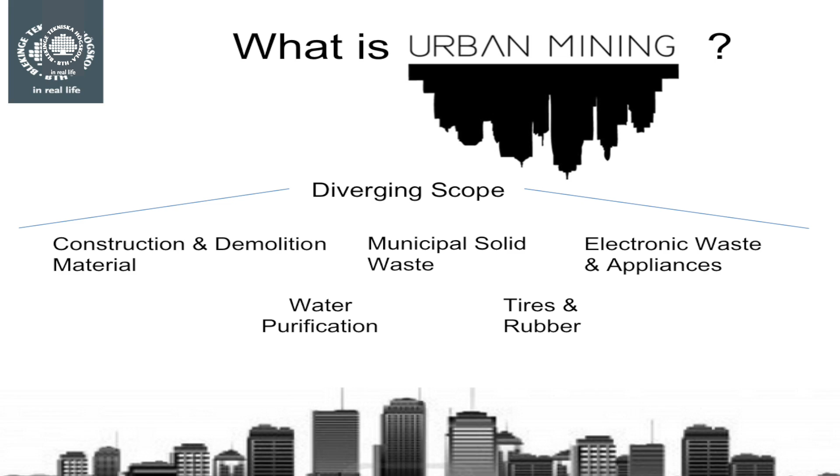To start our investigation, we have researched what the following areas look like today: water purification, tires and rubber, municipal solid waste, construction and demolition materials, and electronic waste and appliances. Together, these areas represent a big part of what we believe is the divergent scope of urban mining.

During our research and development phase, we tried to look for ways to answer the questions of urban mining. Basically, we tried to look for ways to build the bridge between the old and the new, and doing this in a sustainable way.

After our researching phase, we found a solution which we believe is a stepping stone towards a more sustainable mining environment in the construction and demolition area.

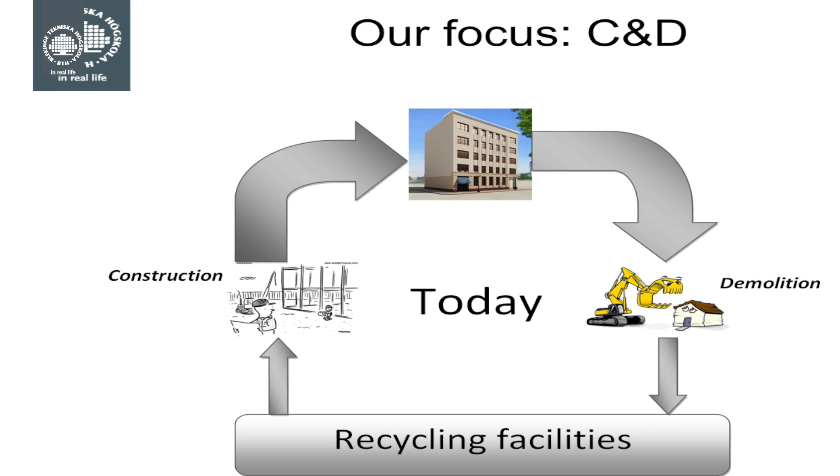So, this is what it looks like today when a building is going to be demolished. We have a company, they will demolish the house, they will do some rough sorting on site, put the waste in different containers before it's shipped to a municipal plant. At the municipal plant, they will do some further sorting of the materials before it's sold to a third company. For example, concrete will be sold to a company that will use it for aggregate or filler in new materials. They will then use it to make, for example, new concrete that they can sell to construction companies that can use it to make new houses. So we have a lot of different companies and we have a lot of different transportation back and forth.

During this project, we've been visiting a lot of different sites and companies, and we conducted interviews at these companies just to see how the material flows today and what the workers at these places think can be improved, or what problems they see in their everyday work.

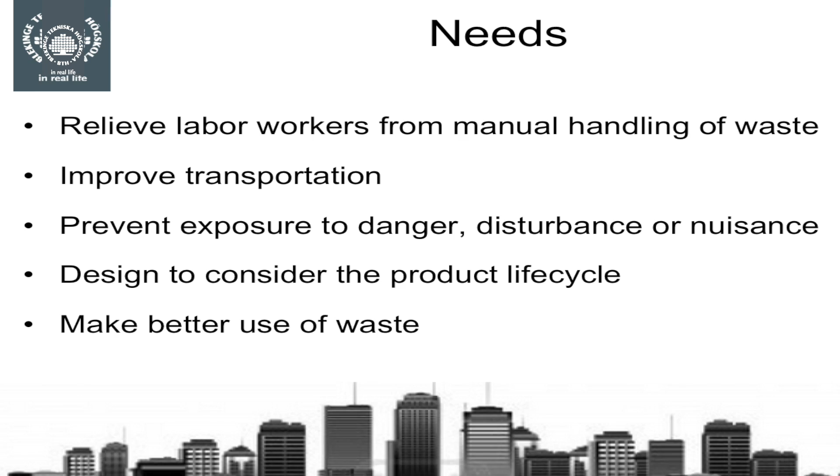From these, we got a huge list of needs, and this, what you see here, is a summarized list of those needs. We have these needs in mind when we start to discuss and think about our vision and our goals in this project and this problem.

For example, one big need is that we want to build a product that is safe to use for the users, the workers, but also safe to be around for unaware people that just walk by. And of course, we don't want it to harm the environment in any way.

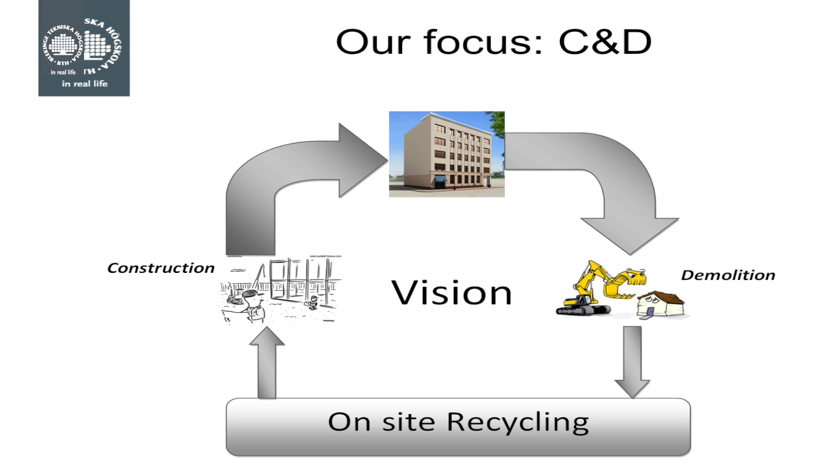So this was how it looked today, and we want to change that. This is our vision. We don't want to change anything in the demolition or the construction part. However, we do want to move the recycling phases to an on-site recycling instead of transporting the material off-site all the time.

This is just a regular old construction or demolition site. We have a lot of heavy equipment machines that tear down the building and put the waste in different containers. And then we have these trucks here. They will come and pick up the waste from these containers and move it to a municipal plant, and the material will go through the steps I told you before. We don't want this. We want to introduce our product instead.

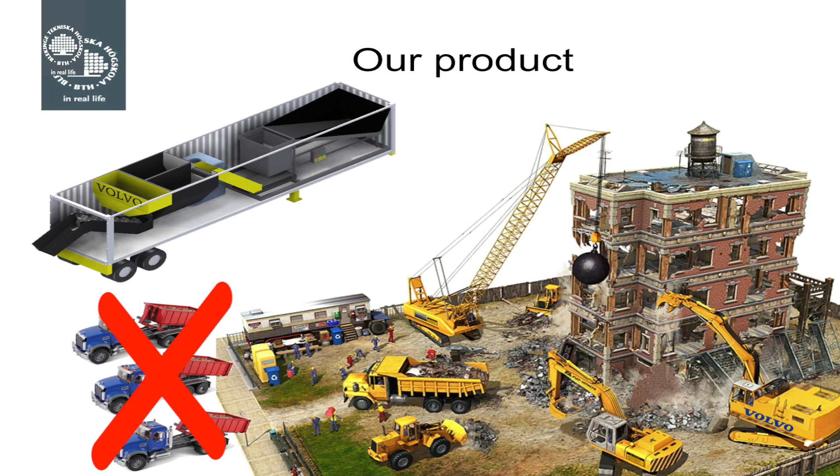This is a concrete recycling plant that is powered by electricity. Basically, you transport it to the construction site or the demolition site, and you leave it there, and it can operate during the whole process of tearing down the building and building up a new one. Basically, you make new concrete out of the old one.

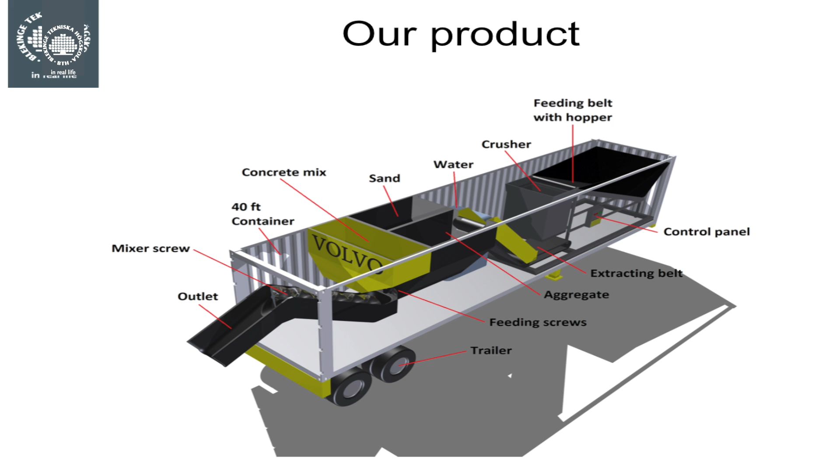So how does it work then? Well, first of all, we have a 40-foot or 12-meter long container that is very easy to transport by boat, train or truck. And it stands here on a chassis or a trailer when it's in use. And that means that the heavy equipment machines on site can move it themselves on the site short distances.

It all starts right here in the front, where an excavator unloads old concrete into this bucket right here, before the old concrete is transported to the crusher in the middle here. And it crushes the concrete down to a small aggregate that we can use to make the new concrete. On the way to the bucket in the middle, where the aggregate is stored before it's used to make the new concrete, we will remove any metals that might be in the mix from, for example, reinforced concrete.

We have another two buckets in the middle, one for sand and one for concrete mix, that is also needed to make the new concrete.

In the end, everything is mixed together right here, and water is added in the mixing screw. The mixing screw will then mix the concrete together, as well as transport it to the outlet right here, before we can use the new concrete to build something new.

For example, wall units or tiles that we can use to build a new house. And actually we believe that we can produce 40 cubic meters of new concrete every hour with this machine.

And we can use up to 30% old used concrete in supporting walls, and even more than this in products that are less demanding.

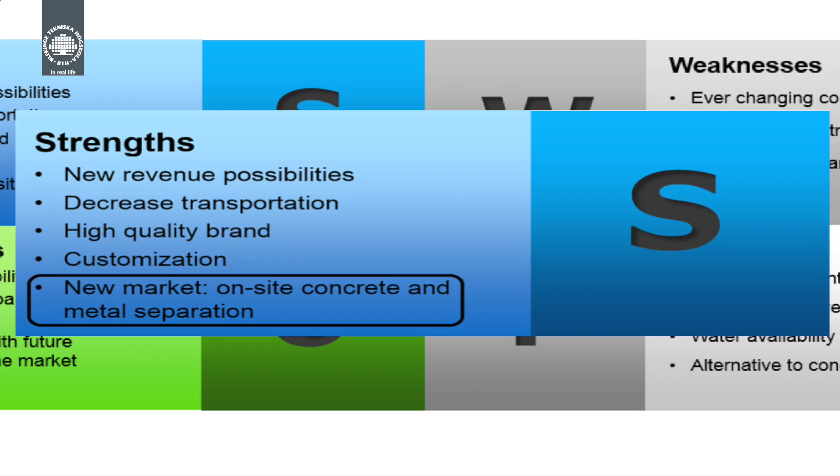Our product operates on a new market, and this market is the creation, recycling, and separation of materials. So, as you know, our product will recycle and create concrete and separate the concrete from the metals.

And onto a weakness. We have ever-changing construction plans, and they can change even during the construction phase. This affects our products and might hinder its effectiveness.

And an opportunity. Our product is in line with future necessities for the market, e.g. new processes and technology which builds the bridge towards a more sustainable mining environment.

And threats. We have cheap alternatives. If our product is successful, it can be copied by other companies which can then claim part of our intended market. And alternatively, different cheaper combinations of machines which fulfill similar customer needs as our machine can be created.

When evaluating an idea from a business point of view, it's important to take both the good and the bad into consideration. So we believe that doing this will give us the opportunity to work on fixing the weaknesses and neutralizing the threats. So now I will present a cost assessment built into an example.

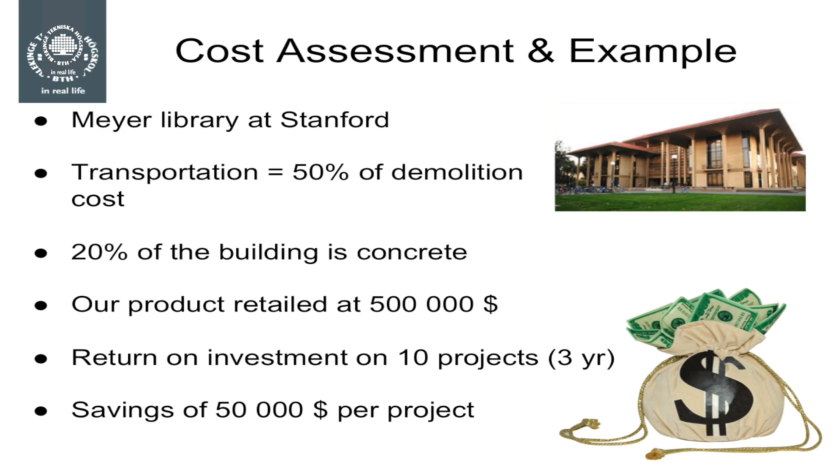In 3 years, it's feasible for a larger demolition company to do around 10 projects. This means that at each project, a $50,000 saving would have to be done. And we think that's highly feasible with our product.

And when presenting these numbers, we want you to keep in mind that these numbers are based on estimations and qualified guesses made by us. However, we think that we've come pretty close to reality.

It's normal for companies within the mining industry to have a repayment period of their machinery of around 5 years. And these numbers are without taking several other saving possibilities which our product presents into account.

So, in conclusion, our product is a stepping stone towards a more sustainable mining environment. It offers savings and reselling possibilities to our customers at a low return on investment. It targets a completely new market, and in that lies the opportunity to redefine not only Volvo's but the entire mining industry's view of market segments.

It satisfies the needs that Gustav presented earlier. It relieves labor workers from manual handling of waste. It improves efficiency of transports. It's designed to consider the product life cycle, and it definitely makes better use of waste than current options.

And we will continue working on this project until summer, making room for further development, more exact calculations, and overall improvements. That was all for us. Thank you for your time.